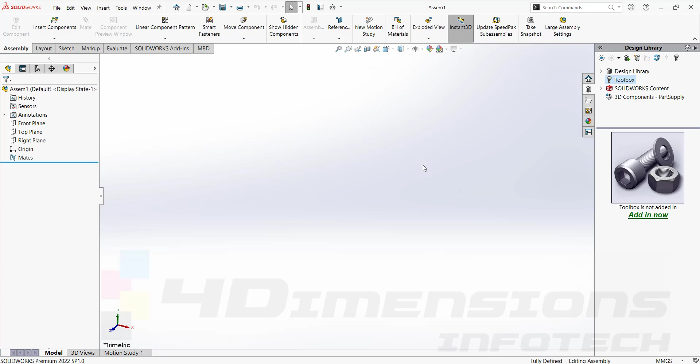To start with rack and pinion mate, I am going to refer to the design library. In design library we are going to take the toolbox option, and from toolbox we are directly going to call the required parts for rack and pinion, that will be rack gear and pinion gear, that is spur gear. I'll say add in now. Standard, I am going to select here ISO, power transmission, gears. So in gears, first I'll call rack gear here.

Rack means a straight profile gear in which we have to mention the module. Module is overall size of teeth. It doesn't have any unit here. So the module I am going to take here is 3.

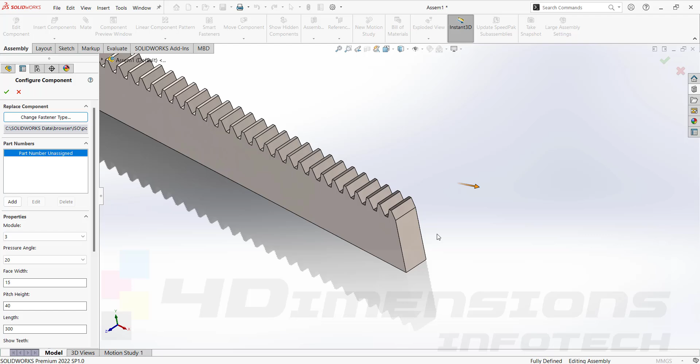Next parameter we are going to see here is face width. It is showing 15 mm here, the width of the object. Next important parameter here is length of the rack, that is 300 mm. Suppose if I want to change the length of the rack, then we'll select this part, say right click, edit toolbox components, and in rack we'll provide the length here as 550 mm. We have to remember that we have taken module value here as 3.

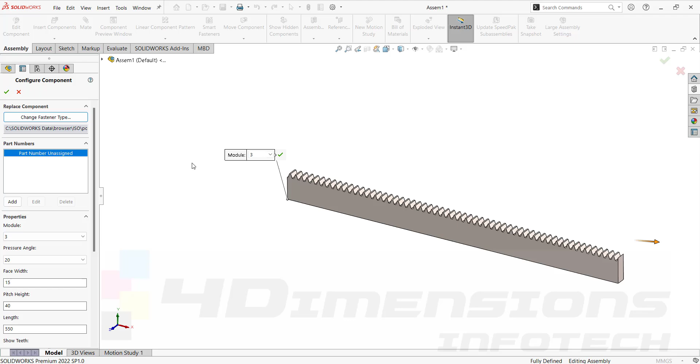Say it OK. Next part we are going to call here is spur gear, which is going to run with reference to rack and pinion arrangement on this rack gear. So we'll call the part here from design library, say spur gear here again. In previous videos we have seen gear mate, and we have seen what are the parameters for this spur gear there. So you can refer that video also, the previous video in playlist. So for spur gear also we will continue with the same module, that is module 3.

Number of teeth here it is showing as 40. I'll change this number of teeth and say 25. So the number of teeth here is showing 25.

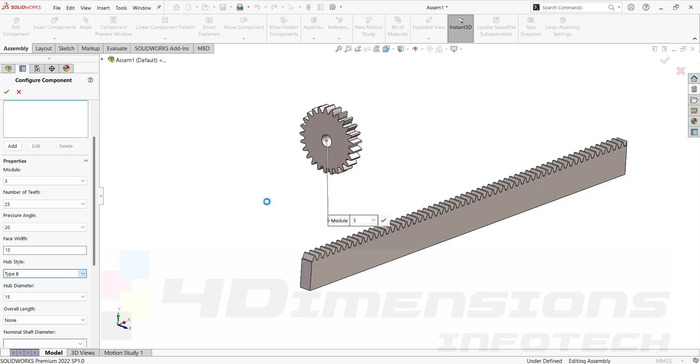Hub style, that is type A only. I'll keep this hub style type A. If you want to change the hub style, then you can go for type B. Hub means one extrusion will appear here. So hubs are used to maintain the alignment of the shaft when the gears are rotating at high speeds. If you want to change the diameter of hub, you can change the diameters also here. You can control the style of hub. If you want both sides, then you can go for the both side option here.

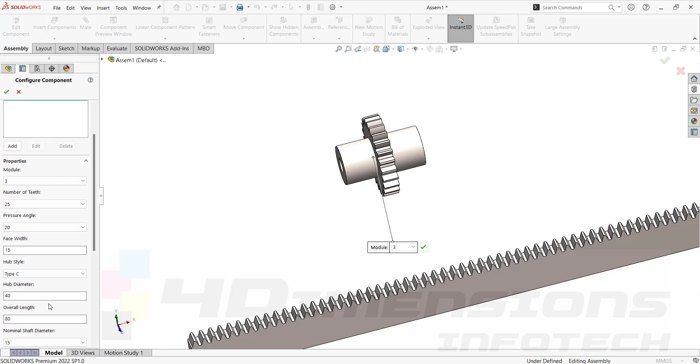Suppose I want to change the length of the hub. I'll say it 80 mm. So this hub length is 80 mm now. Nominal shaft diameter here it is showing as 15 mm. You can see here nominal shaft diameter is 15 mm. I will remove the hub here. I have taken that hub only to show you what is hub and how to customize the hub. We don't require hub here. I'll say it OK. So we have configured the gear also here, spur gear.

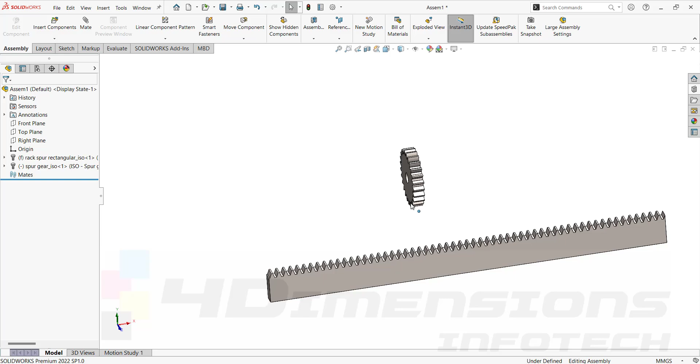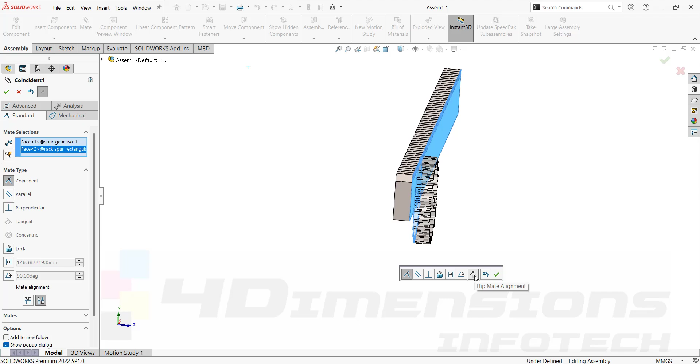Now the first mate we are going to apply here is coincide mate between front face of the gear and the front face of the rack gear. We'll flip the direction. Both the faces are being coincided here, but they are at opposite directions. So if you want to coincide them in same direction, then we'll flip the direction of the alignment. Say it OK. Now you can see both front faces of the gears are coplanar now. So after making coincide and coplanar the front faces of the gears, we'll arrange this gear, take this gear at upward side, keep the rack normal here, let that gears be engaged here.

Next, we need to show the pitch circles here. So we'll go in spur gear option in model tree. We'll select the spur gear part in model tree, and you can see the tooth cut option here. And in tooth cut, you have to show the sketch here. By expanding this arrow, you will get this tooth cut sketch.

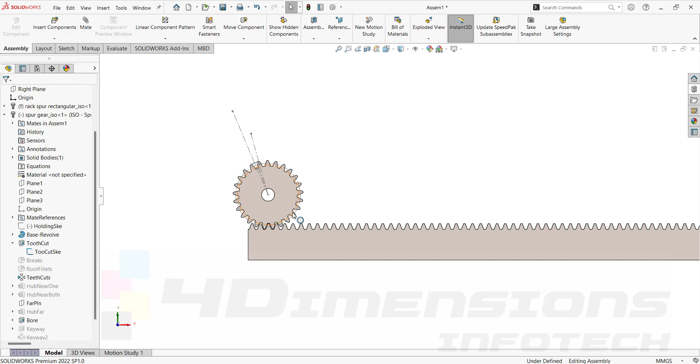You just need to show it, then the pitch circles for that gear will be shown here. So we will require to show these pitch circles here. It will also highlight the center of the pitch circles here.

After showing the pitch circles, we'll go into the mate option. We don't need to select any mate directly, we just need to give the selections between which we want to apply the mates. The selections will be the center point of the pitch circles we have shown in the sketch, and the second selection will be the edge of the rack.

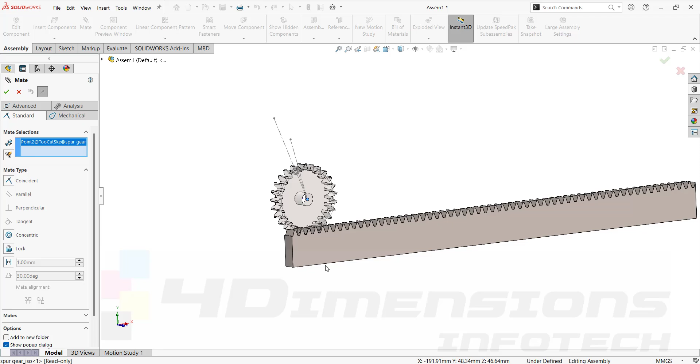Suppose if this gear directly comes down here, it may not apply the rack and pinion mate. That time you just need to close the software completely, restart SolidWorks, and then apply the same steps. So I am going to do that.

So we have restarted SolidWorks and completed the back steps here. Again we are going to start with the mate, and what we were going to do is select the center point and the rack's bottom edge here, and whatever distance it is showing, we just need to select the distance icon and apply whatever distance is coming between this point and line.

If this gear again comes down, we have to repeat the same process, that is to close the software and restart it again and then repeat the mate. I'll say it okay here.

So here we have applied the distance mate. We have not counted any distance, we just clicked on this point and edge. Whatever distance came, we just applied by saying it okay.

Now we are going to go for mechanical mates, and in mechanical mates we are going to go for rack and pinion. Select the rack here as this linear edge of the rack, and the gear here as the pitch circle, the outer pitch circle of the spur gear. We have given the selections of the references required for the rack and pinion mate.

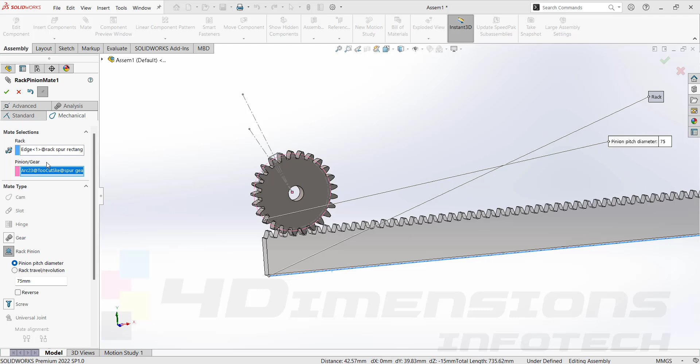I'll say it okay. And now if we drag this part here, you can see this gear is following the teeth of the rack and traveling in between the rack here.

Suppose if I want these two parts to be moving in relative motion with each other, then I'll provide one more part here, a shaft. You can see here the diameter is showing at the bottom, so what we'll do is make one part or shaft here with diameter 15 mm.

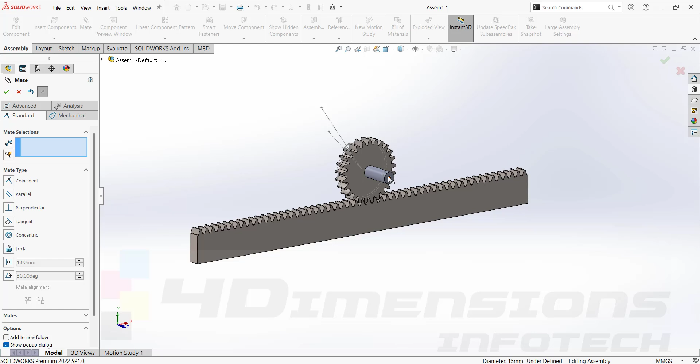Say it okay. To align the shaft between the gear at the centers, we'll go for advanced mates and select the width mate. In width selection, I'll select both side faces in the gears. This shaft is now centered and aligned here.

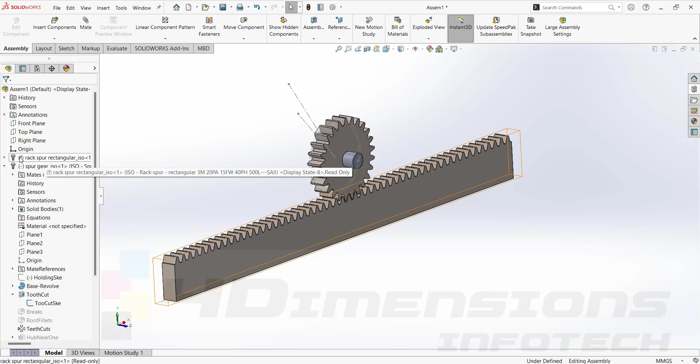Say it okay. And now, as we had called this rack gear the first part, this part was fixed. You can see the rack gear here with the F sign showing, highlighting that this rack was fixed. So I will float this rack and make the shaft fixed instead. It is compulsory to make one part fixed.

Then only will we get the relative motion between the spur gear and rack. So I'll fix this shaft. And now if I drag this rack here, you can see the gear is also being dragged, but the motion of the rack gear is becoming inclined.

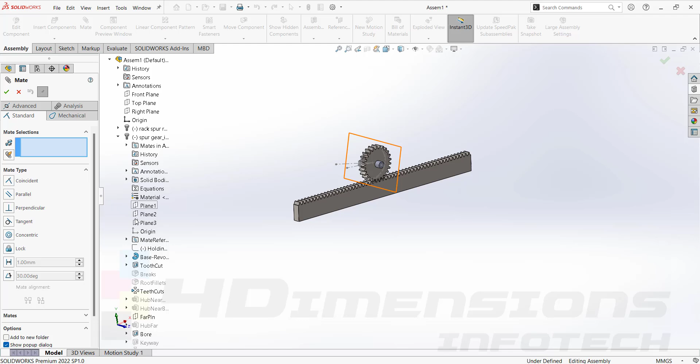So to solve that, we'll go for a parallel mate. For the selections, I'll apply the mate, and while applying it we'll open this pin part and take the top plane of the pin parallel with the bottom face of the rack gear.

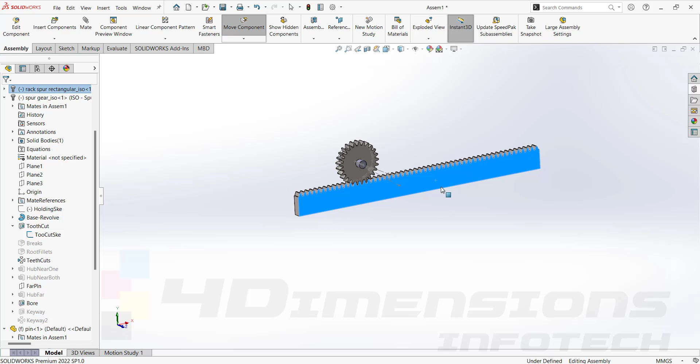Now you can see the parallel mate has been applied. Say it okay, again okay. Now this rack gear is also stable. You can drag and see the rack and pinion arrangement and motion has been applied here. I'll hide these sketches here.

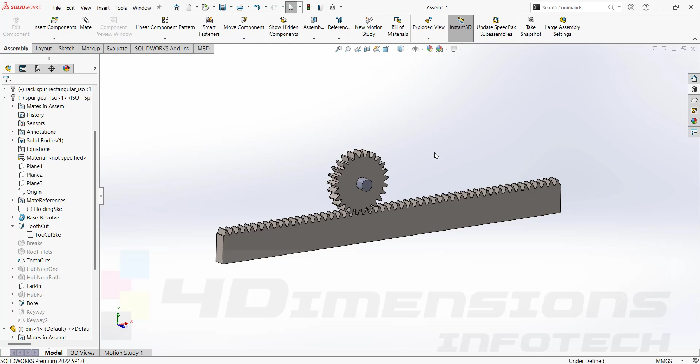In rack and pinion arrangement, one part rotates and the other part reciprocates relative to the first. An example is the steering wheel of a four-wheeler. You can also see rack and pinion in a glue stick: as you rotate the glue stick from the bottom, the tube comes outside in linear motion, so circular motion at the bottom is converted to linear motion. We call this relative motion a rack and pinion mechanism.

The steering wheel of a four-wheeler is also an example. As you rotate the steering wheel, the axial shaft of the steering wheel will reciprocate. So that is also one of the examples of rack and pinion.

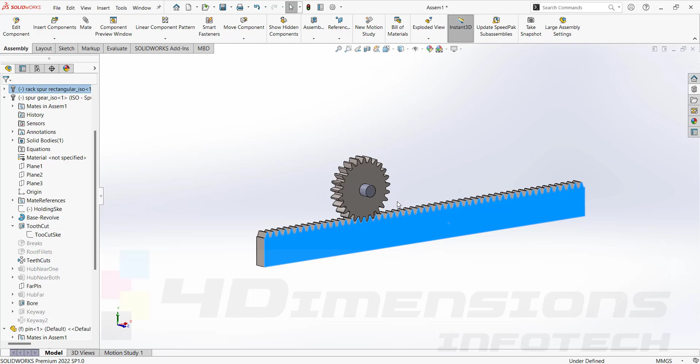The next mate we are going to see here is the cam mate. For that I'll browse the parts I've made for cam mates. First I'll browse the cam base here; I've made it circular. For different machines this cam base may differ in shape and size, but I have made it circular.

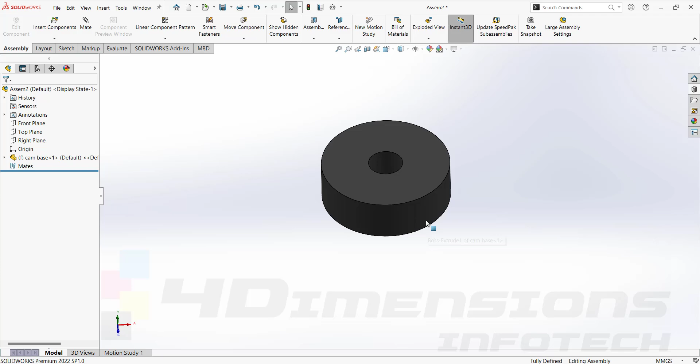As it is the first part of the assembly, I'll right click this part, say float, and apply the coincident mate between the first part's origin and the assembly's origin. This will make all the planes align at the center. You can see all three planes of the assembly in the first part are now aligned here.

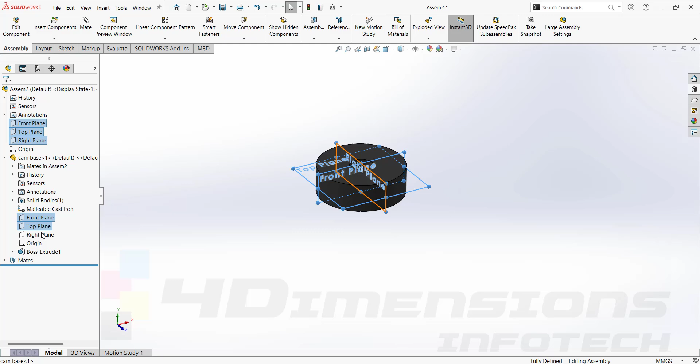Then we go for the next part. I'll insert it here; we will consider it as the cam piston rod. Say open. Now we will make these parts concentric. Say OK. We will keep this motion in continuity.

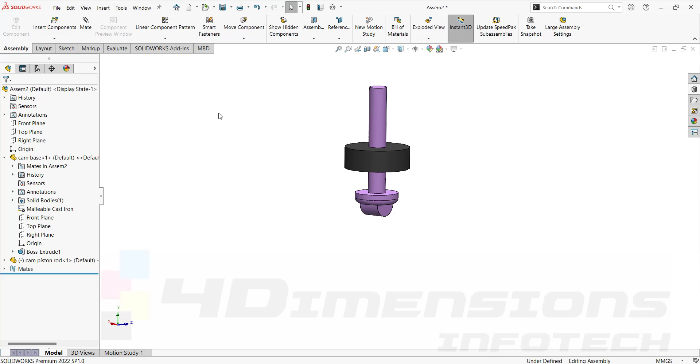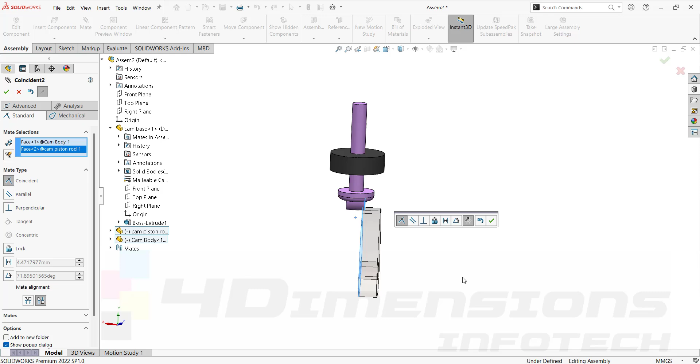The next part we call here is the cam body. Say open. We will coincide the front flat face of the cam body with the flat face of the cam piston rod. Both faces are coincided, but the alignment is opposite, so I'll flip the mate alignment. Say OK, and now both these faces are coplanar with each other, as you can see.

The next part we call here is the cam shaft, but before that we will revise the mates we have taken. The first mate was a coincide mate, coinciding the assembly's origin with the first part's origin. The second mate was a concentric mate—you can see the parts highlighting the required surfaces selected for the mate. Then the third mate was a coincide mate between these two faces.

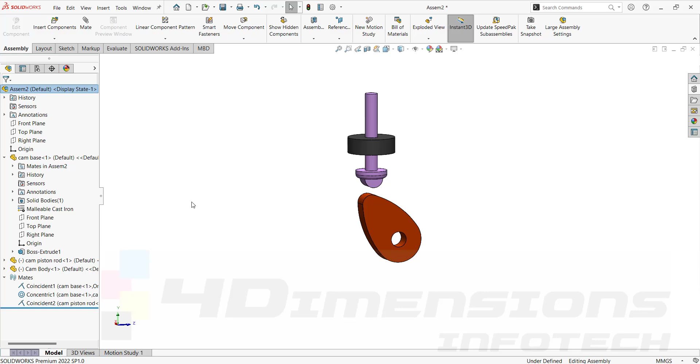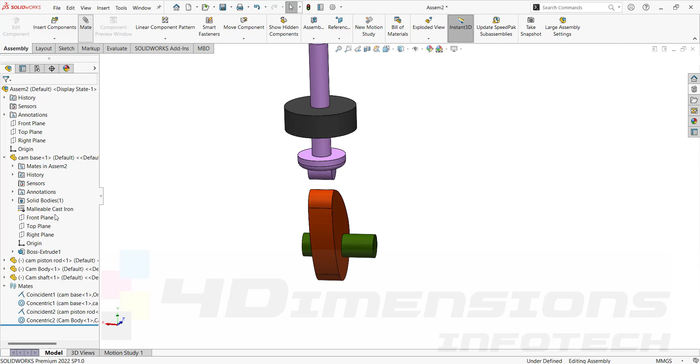The next part we call here is the cam shaft. Select the cam shaft, say open. Again, mate: make this cam shaft concentric with the cam body's hole here. Say OK. Next we apply the width mate for the center alignment of the shaft. Select the mate option, go for advanced mates, width, select the required faces of the shaft, and same for the body here. This shaft is now center aligned. Say OK, and now you can see this shaft is not moving horizontally.

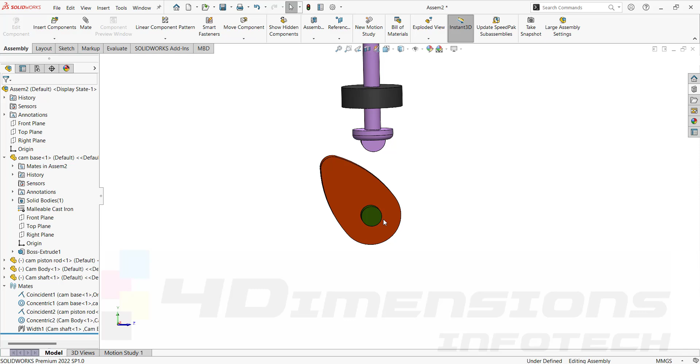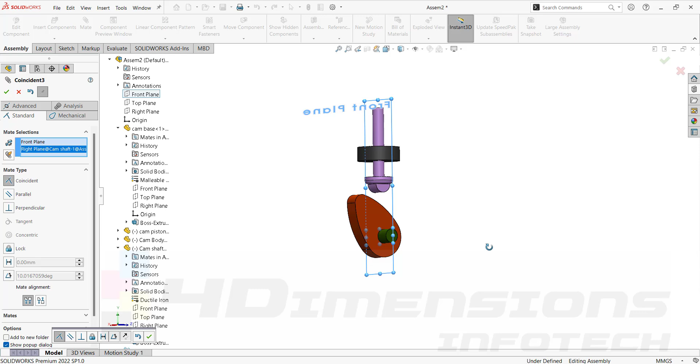So I want to make this shaft align with the cam piston rod so it should not move horizontally. For that, I'll coincide the center plane of the assembly with the center plane of the shaft. We go for mates, select the front plane of the assembly first, and the same orientation plane for the shaft, which is the right plane here. So both planes coincide now, as you can see. If I coincide this shaft plane with the assembly's plane, the shaft will stop moving side to side. Say OK, and now if I drag the shaft at the sides, you can see it will not move, since the center planes of both the assembly and the shaft part are coincided.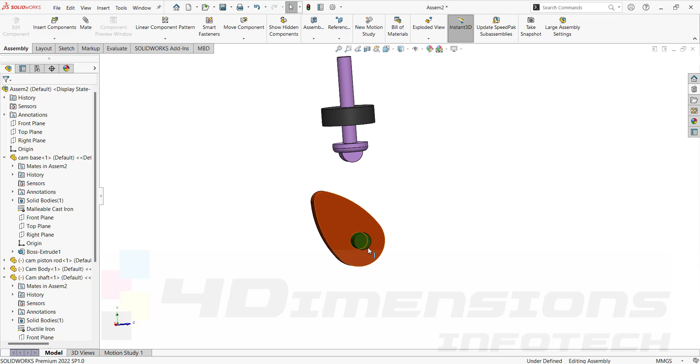Next, we are not having any standard height for the cam shaft to be placed. So I'll randomly place the shaft here. I'll right click on the shaft and fix the shaft here.

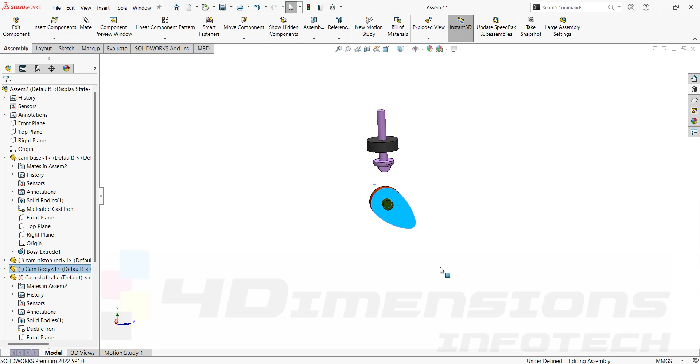As the shaft is fixed now, it will not move vertically also. You can see the cam movement around the shaft. All the parts are moving as per condition except the cam base and cam shaft.

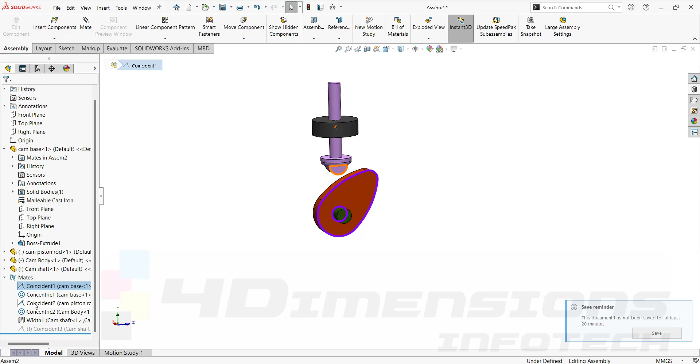Now we will again see the history of the mates we have given here. First mate was assembly's origin with first part origin. Second was concentric mate. Third was this coincident mate, you can see the faces highlighted there. Fourth was the concentric mate between cam shaft and cam body. Fifth was the width mate.

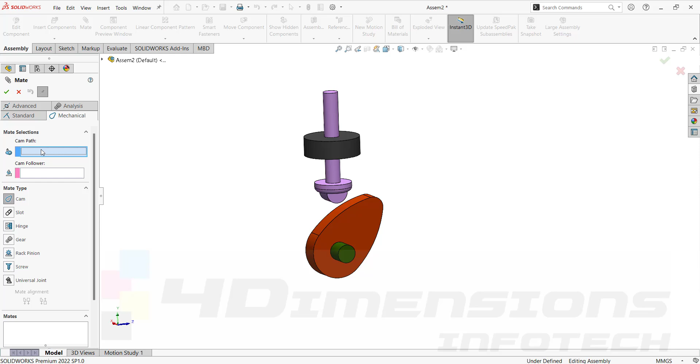Now the next mate we are going to take here is cam mate, which comes under mechanical mates category. Select the mate option, go for mechanical mates, and select the cam mate here. In cam mate, first we have to select the cam path. I'll select this as a cam path, the side faces of the cam body.

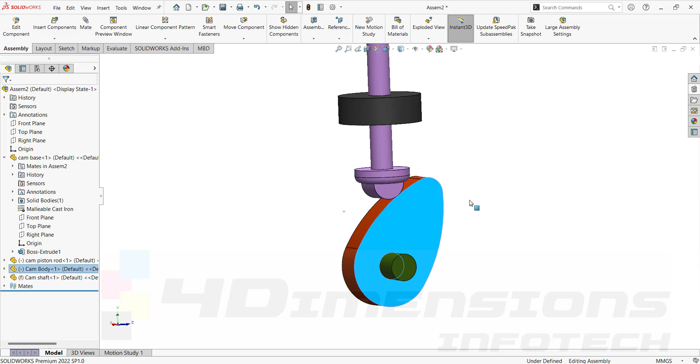Then we'll go for cam follower. For that we will select this round portion of cam piston rod. Say OK here. Now as I rotate this part, you can see this cam piston rod is tangent with the cam path, so it will follow the cam path here.

As we rotate the cam body, you can see the reciprocating motion there. So here the cam mate has been applied. This was cam mate for you.

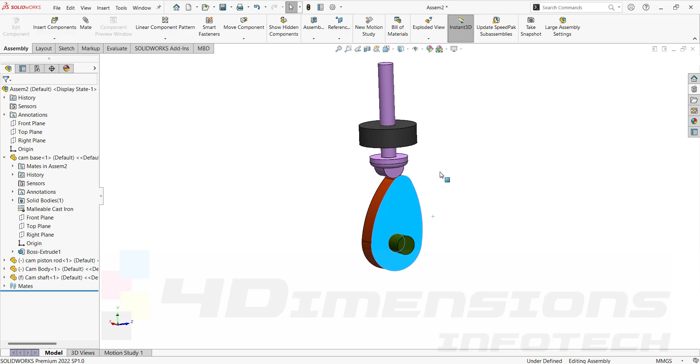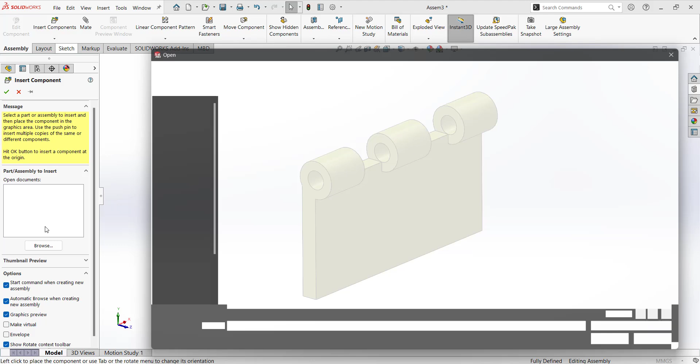So the next mate we are going to see here is hinge mate. To start with hinge mate, I'll browse the parts here. I've already made some parts for hinge mates. I'll select hinge 1, which is having 3 knobs here. I'll call the second part also, the mating part having 2 knobs here.

Now both of them are lying at the similar sides. We'll rotate the second part. Here you are having a rotate component option, by which you can rotate the part orientation without applying mates. So I'll select the rotate component option here and rotate this part orientation.

Say OK, and now we will go for hinge mate. For that we'll select the mate option and directly go for mechanical mates and hinge mate. Hinge mate is nothing but a combination of two mates, that is coincident mate and concentric mate. Both these mates can be applied at one platform here, that is called hinge mate, and it comes under mechanical category only.

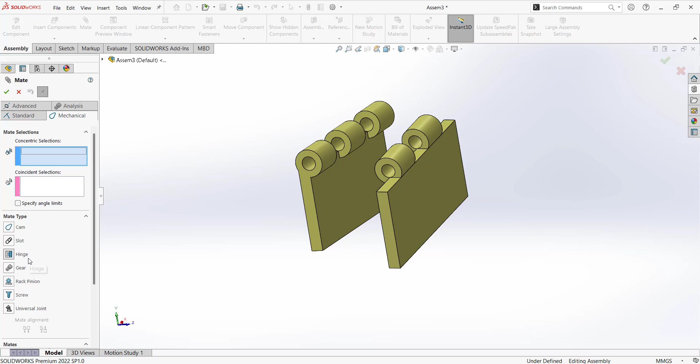So for concentric selections, I'll select the circular faces here. And for coincident selections, I'll select the alternate faces which are going to be engaged as these hinges are put together. So I'll select this face here, and the other face I'll select this face of the first knob. Say it OK.

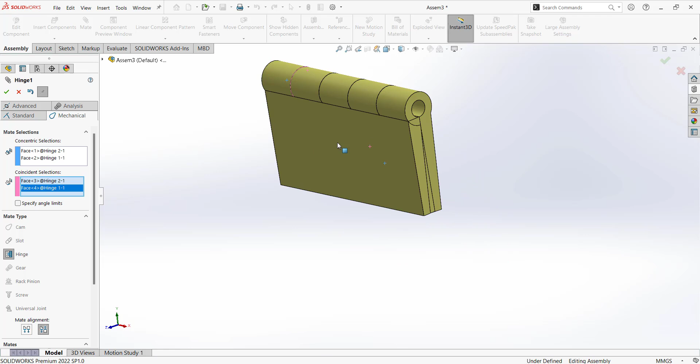Now you can see hinge mate has been applied and both these parts are engaged together with hinge mate. But we can also see this part is rotating completely 360 degrees, so we'll apply the limit angle mate there.

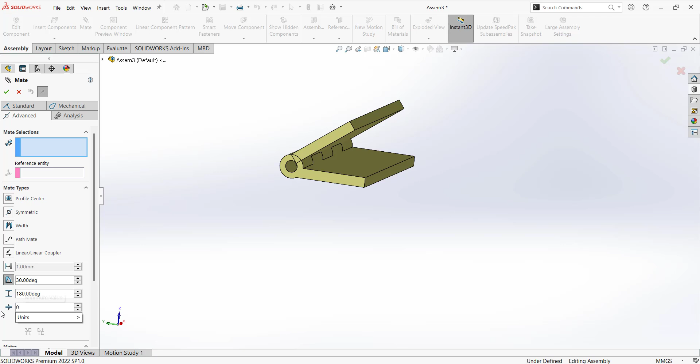From advanced mates, I select the mate option, go for advanced mates, select the limit angle mate. The maximum angle I am going to select here is 180 degrees, and minimum angle will be 0 degrees. The selection of reference faces I am going to give here is internal faces. You can flip the part orientation as well as flip the part dimensions also, as you can see here. Say it OK.

Now as you rotate this part, it will go for the maximum angle here as 180 and minimum 0. It will not completely rotate now as limit angle mate has been applied. So this was hinge mate here.

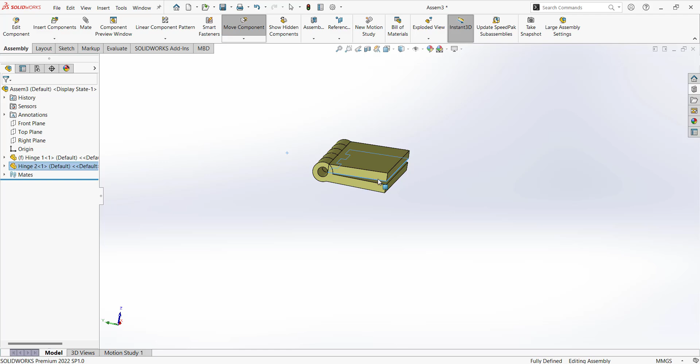So these were all the mechanical mates. In the next lecture we are going to continue with some more commands related to assembly. Till now we have completed all the mates, so to learn all the mates, please go through the SolidWorks playlist given there. Till then, thank you.